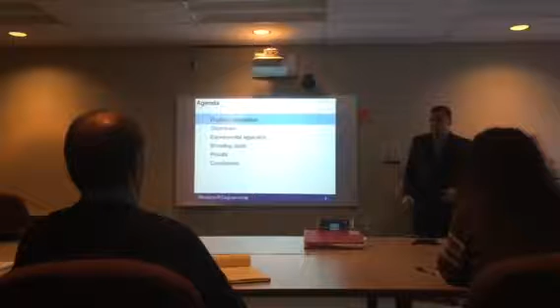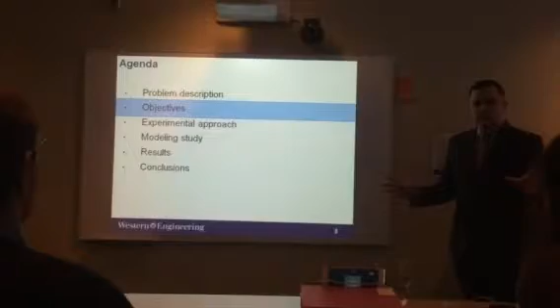The agenda I'm going to be following today is represented in this slide. I want to start with the problem description and explain the motivation for this research. Then I will go through the objectives. I divided the presentation into two parts: experiments and modeling. Finally, I want to show the results and conclusions. So let's start.

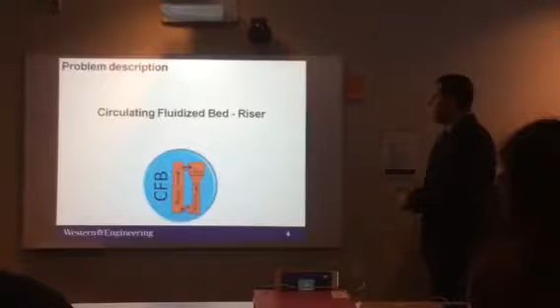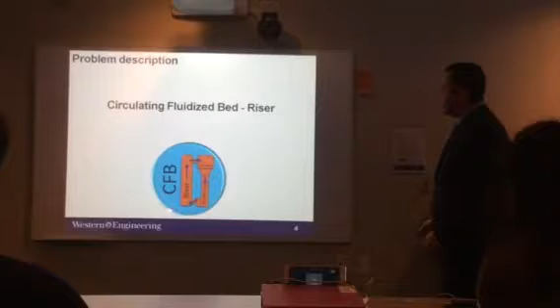Circulating fluidized beds using risers have been implemented in large amounts of processes nowadays in industry. The main feature is that the fluid goes through the riser one time, while the particles circulate in a closed loop many times.

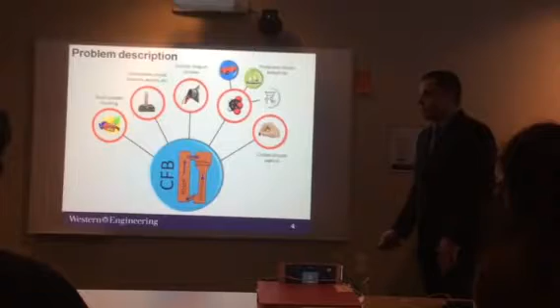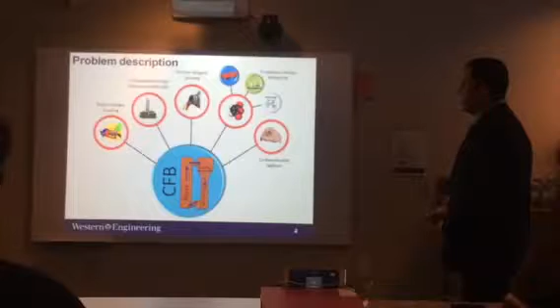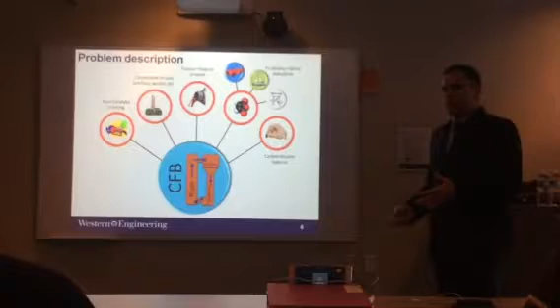As an example of the application of circulating fluidized beds, we can find the production of gasoline in fluid catalytic cracking, in the combustion of coal, biomass and waste in power plants for power generation, in the Fischer-Tropsch process for the production of synthetic oil and synthetic fuel, and in the production of maleic anhydride, an organic compound used to give superior properties to polymers used in the automobile industry, in recreational boat production, and bathroom fixtures.

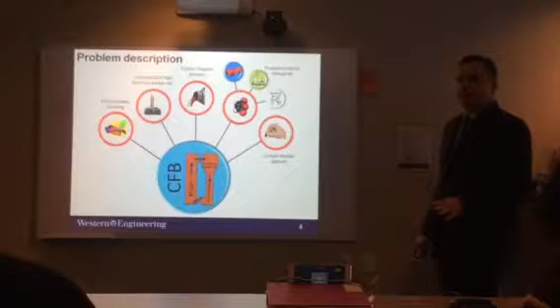We can also find circulating fluidized beds in carbon dioxide capture, to mitigate the emission of carbon dioxide to the atmosphere. As you can see, circulating fluidized beds are very important nowadays.

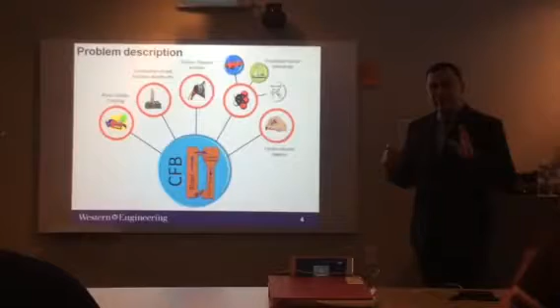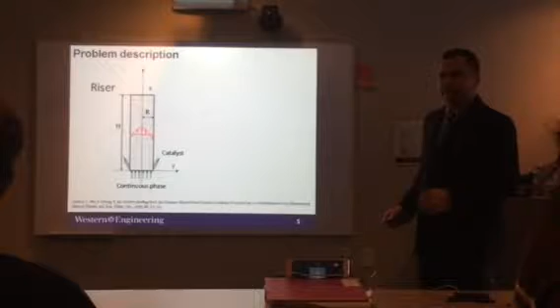When we look into the riser of the circulating fluidized bed, we notice that everything goes up against gravity. That's why risers present a major problem: a back-mixing effect in the near wall.

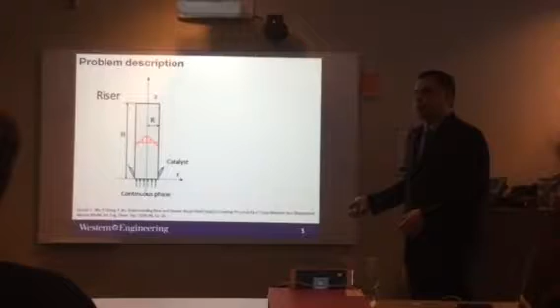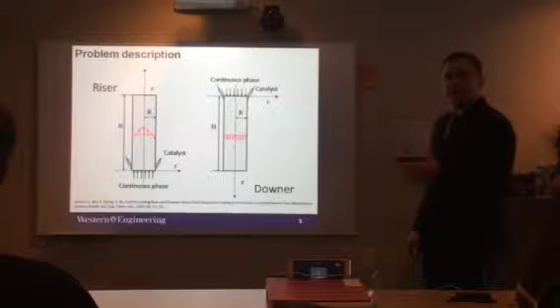I dedicated my study to a solution that can be used in circulating fluidized beds, and that solution is the application of a downer. In the downer, everything goes down in the same direction as gravity, and that's why the profile is flatter, which is very convenient for some processes.

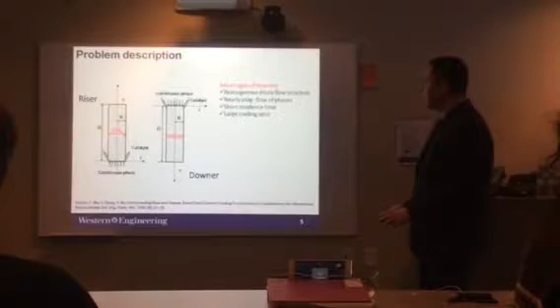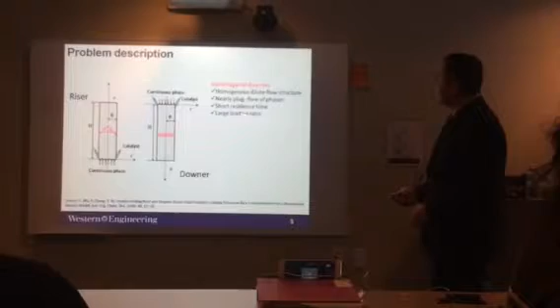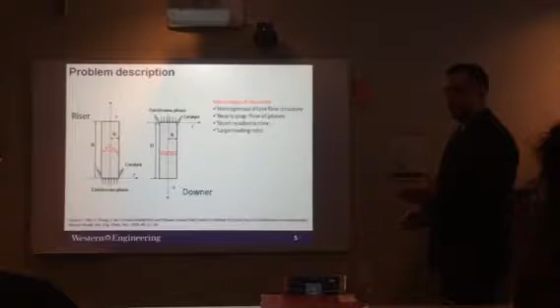In the downer, the main advantages are a homogeneous dilute flow structure with better selectivity, a nearly plug-flow of phases with narrow residence time of particles inside the reactor, short residence time because the back-mixing effect is not there, and we can load the reactor with a large ratio between catalyst and fluid.

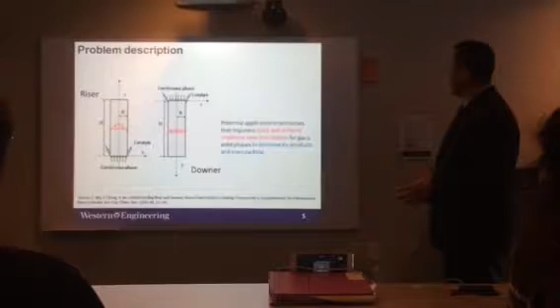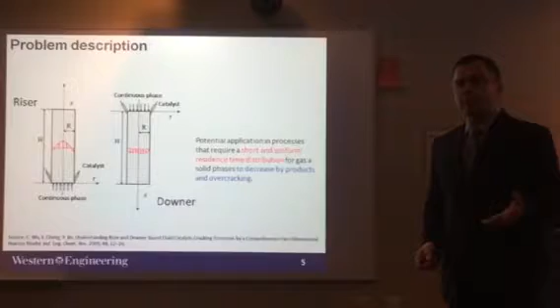Having said that, the downer has potential applications in processes that require short and uniform residence time distributions. An example of such a process is gasoline production, since gasoline is an intermediate product where selectivity is important and reactions are very fast.

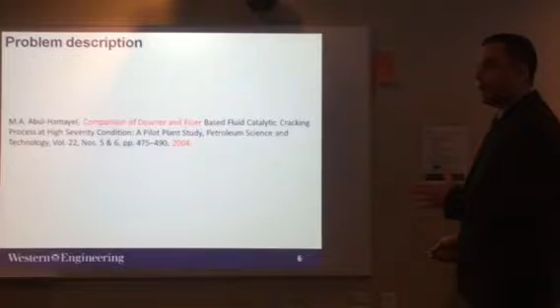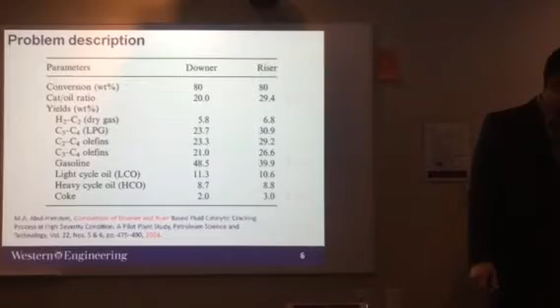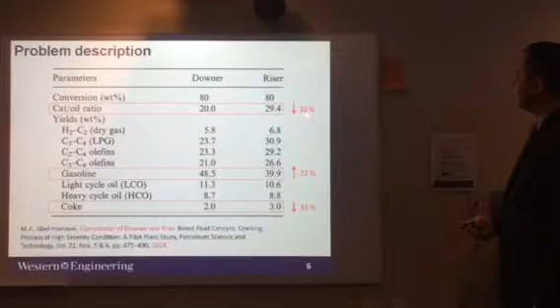In 2004, Abul-Hamayel did a pilot plant study comparing downer and riser for FCC application. He found that, when comparing similar operating conditions, the downer produced 22% higher amount of gasoline, with a lower amount of coke, and 32% lower amount of catalyst needed in the unit. These results are very promising for the application of downers in industrial processes.

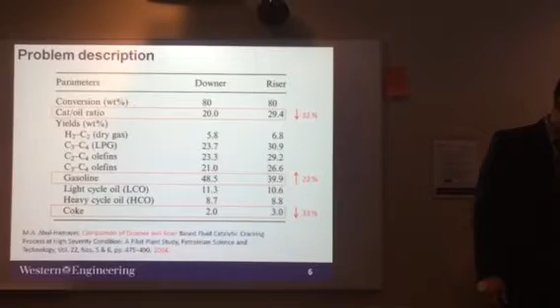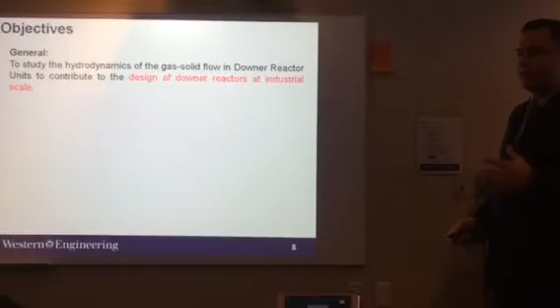Now let's talk about the objectives of my research. The general objective is to study the hydrodynamics of the gas-solid flows in the downer, to contribute to the design of downer reactors at industrial scale. The specific objectives are the following: individual...